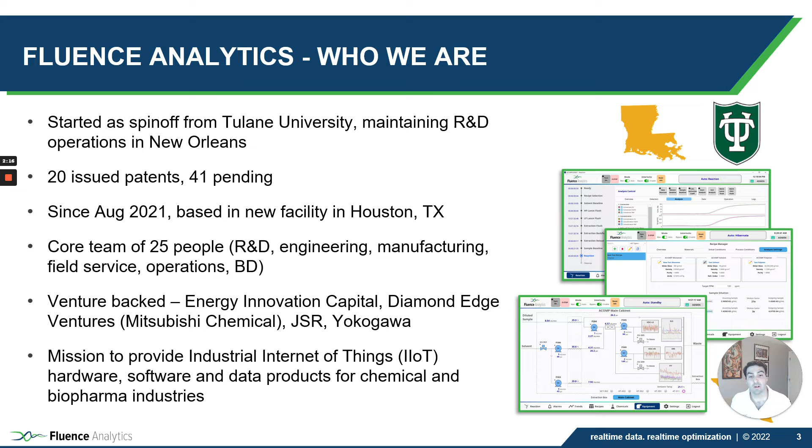We raised capital from Energy Innovation Capital, Diamond Edge Ventures, which is the venture group for Mitsubishi Chemical Holdings, JSR Corporation, and Yokogawa Electric. And our mission really is to deliver products that help our customers produce their products better. So everything from the hardware and software sensors required to optimize production.

So some of the issues we saw in the industry are around this problem of manual sampling. We see visiting plants all over the world that in the polymer industry specifically, there is still an extremely heavy reliance on manual sampling of the process to analyze critical properties of interest.

So what that means is either at the end of a batch or every hour, every 2 hours during a continuous production cycle or semi-batch production, there are operators taking samples, taking them to a QC lab where then a technician does sample prep and measurement, sometimes several measurements. And then you have data that is typically hours old, then sent to the control room either to take a very conservative control action or just see what you made in the batch.

Now, that's not to say this process doesn't work. Obviously, our modern lives are impacted by polymers as they're found everywhere. However, there is some inefficiency when you don't have real-time information about the properties of interest, which is fundamentally what our customers, polymer manufacturers, are selling to the end users, how those polymers will perform in that final application.

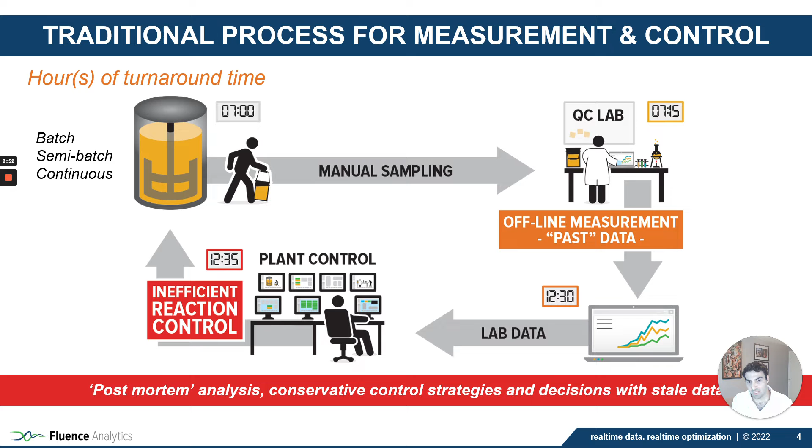So we've seen this. This is a very standard and fairly well-known issue in the industry. So looking at what that directly impacts, if you think about quality, you look at in a continuous production, off spec from grade transitions or deviations from steady state. In batch or semi-batch, you're looking at just not hitting the target you wanted after your full production cycle.

And what that leads to is rework. So maybe you have material that you blend with other products, good product, to get an average product you sell to a customer. Or you are altering your production style and schedule to minimize some of the issues that are known in transitioning materials or campaigning certain batches. So that leads to excess inventory that if you had better control and more dynamic optimization, you might not need.

On the quality side, this we've actually seen within plants: same reactor, same operator, same feedstocks, different product comes out. Then imagine if you take that globally, where you have different feedstocks, translated SOPs, different skill sets of the operators, and the equipment everywhere is completely different. So being able to replicate quality with all of these changing variables is a key point, and can be quite challenging. So that's where more dynamic control or dynamic measurement can be helpful.

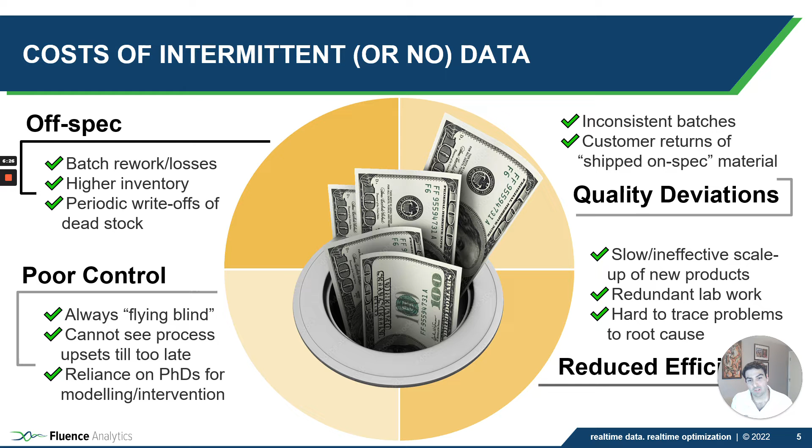And then on the efficiency side, obviously, if you're looking to scale up, crank out new products, change different recipes, target very specific applications, that scale-up process can be slow and difficult. Break-ins in production can be quite time-consuming if some of the issues aren't worked out. And then there's quite a bit of lab work you need to do there, or even tracing problems.

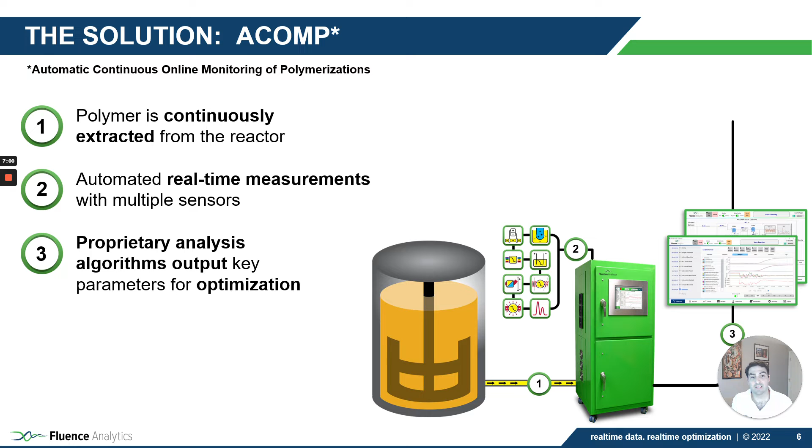So what we've developed is ACOMP, which is Automatic Continuous Online Monitoring of Polymerizations. And at a very high level, this is how it works. We're continuously extracting from the reactor. We have conditioning and measurements all happening in an automated system inside of our enclosure with multiple sensors. And then we have proprietary software that takes that raw data and computes those parameters of interest to our customers, which then goes to the control room where control decisions can be made.

So as you can see in the process, what this means is 30 to 50 times faster data, 36,000 more data points per hour. If you think about it, you get one data point per hour from the lab versus one every second from online. So basically, the amount of information available to the operator, the human in the loop, is orders of magnitude above where we are today.

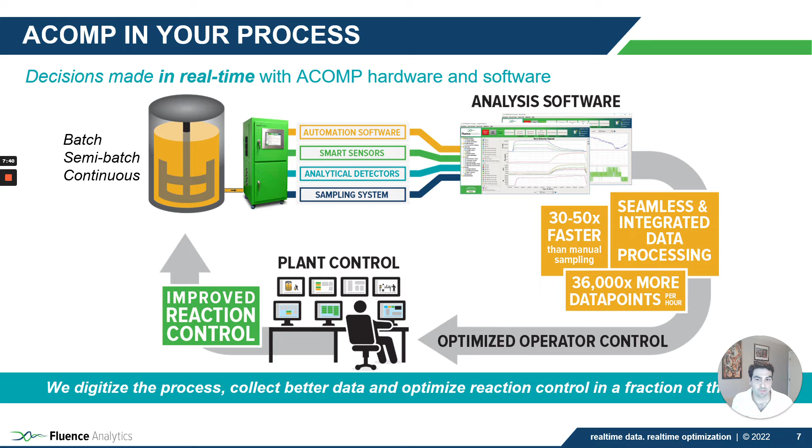And if we think about what that impacts, you saw the costs and the effects of that lack of data. So if we really break it down, how do we translate that to value? We're talking about cycle time reduction and freeing up capacity. We're looking at reducing need for certain analytical testing over time. We're looking at avoiding degradation of product and off-spec production.

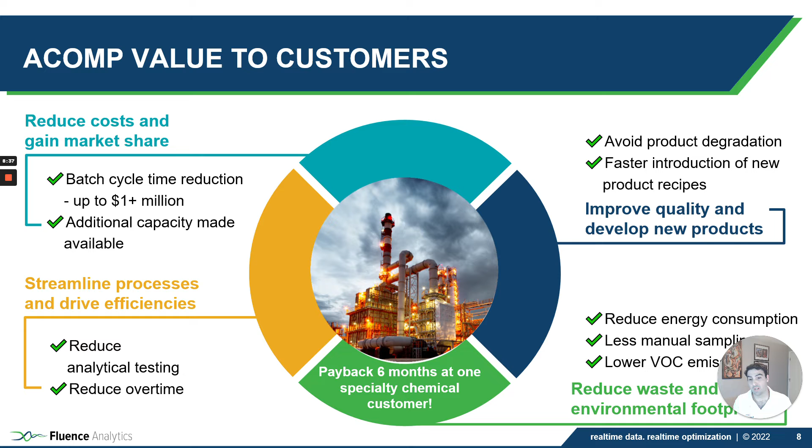And then we're thinking about where we can impact this waste environmental footprint. So the manual sampling, emissions, those are exposures. So those are safety concerns for operators and plant personnel. And then anytime we reduce consumption. And we've seen ROI in less than 1 year, in one case 6 months, for delivering on a few of these different areas.

And if we look at what we can work in, this is not a tool we can use everywhere today. We do have a roadmap to cover as much of the polymer industry as we can. As many of you know, this is an industry that has everything from commodity, high volume plastics, all the way to low volume specialty, high value batches for semiconductors or electronics or certain adhesives and paints and coatings. So it is quite a diverse industry, and so we do have a roadmap to cover as much of it as we can.

But today we're particularly focused on anything that is in a liquid or melt phase, and that's where we can do most of our measurements. And then for other systems, maybe we can't make all of the measurements, but we can track certain other key parameters. So if we engage with you, we can assess your application, some of your objectives for optimization, and see where our technology solution fits.

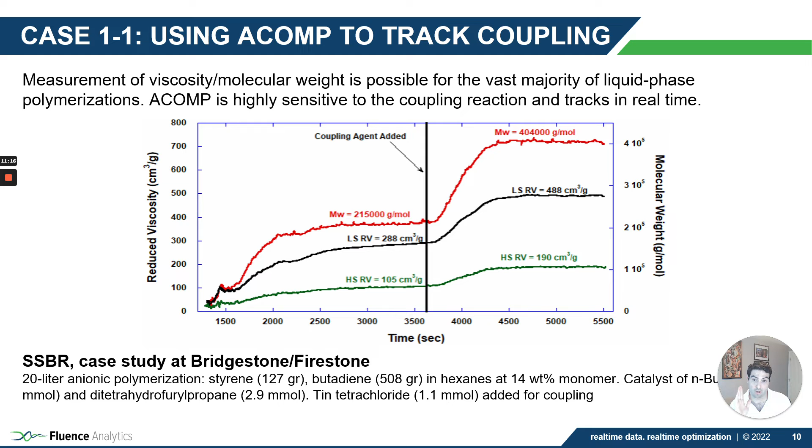And then obviously, if you don't have extra steps, how you can use that data to know when your batch is done if you're targeting a very, very specific molecular weight or viscosity, for example.

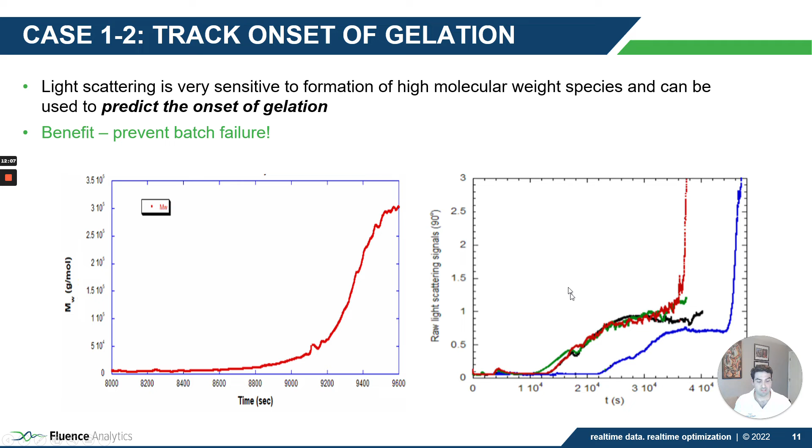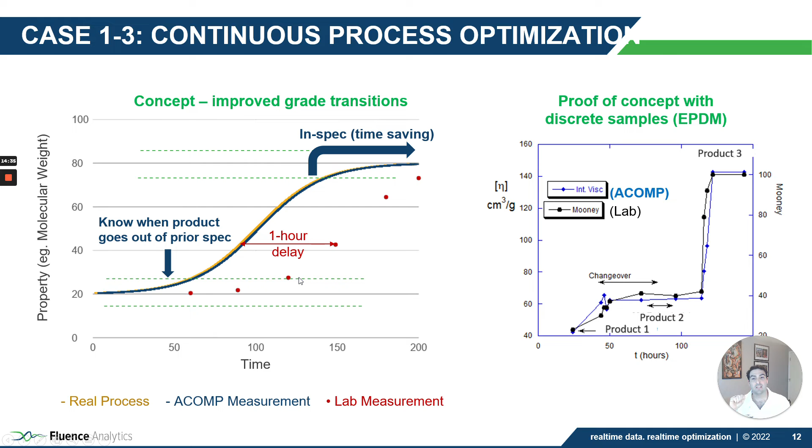A lot of times that control is driven by, or at least validated by, offline data points taken every 30 minutes, every hour, every 2 hours. So you can imagine that the control algorithms used to drive those processes are fairly conservative to account for the fact that there is a lot less lab data. So the advantage here is having real-time information allows a faster path to get to spec and know when you're in spec. And then once you're at steady state, say you're producing at this midpoint, anytime you saw a deviation out of specification, you would know based on the real-time information and take corrective action.

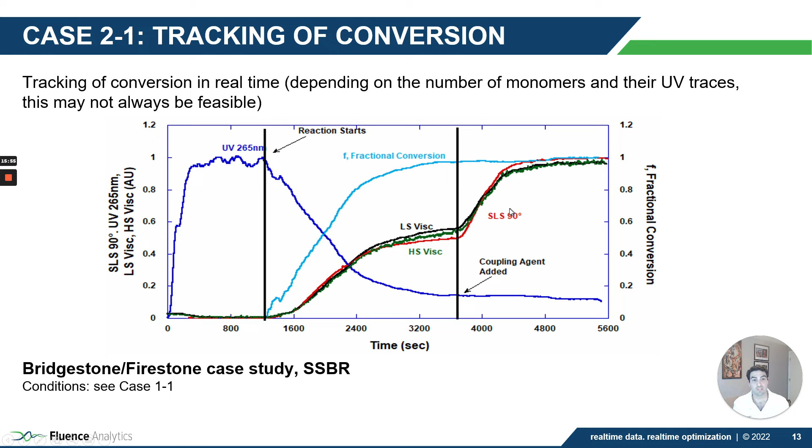In this case, what we were able to observe is that given a lot of the variability, which I highlighted earlier, that you see in batch production, the feedstocks, the operators, the equipment, all those different things that can change, the reality is that you're going to hit your target specifications at different points. The kinetics will vary reaction to reaction. And so what we saw was that on average, if you use the dynamic endpoint, in some cases you were done several hours sooner than the standard SOP.

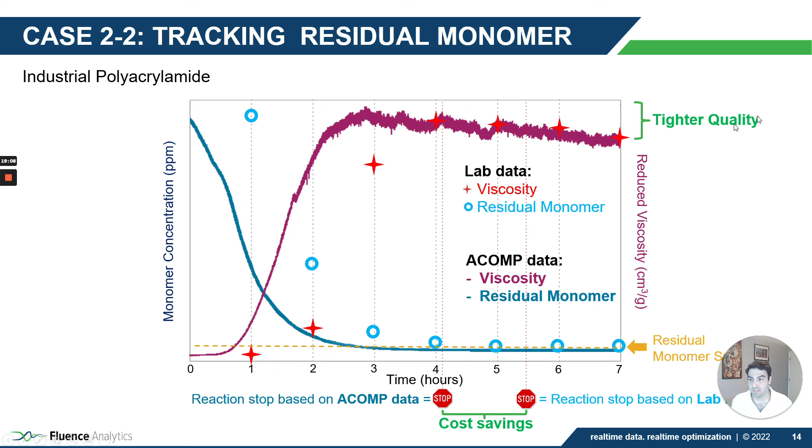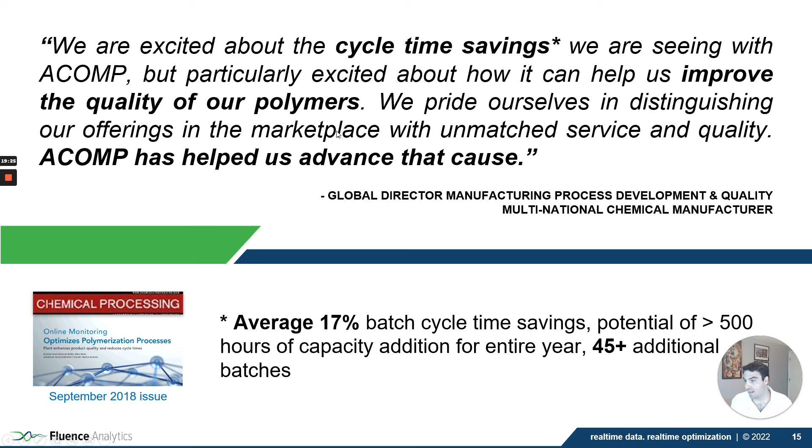A little bit more detail about how the technology works. So as we mentioned before, we're continuously extracting a very small stream from the reactor, anywhere from 0.05 to multiple milliliters per minute. And that actually comes into our ACOMP front end, where we've developed a fully automated set of sample preparation and sample conditioning equipment.

And then we use either a process solvent or a different solvent to get that polymer stream continuously through our process into a very low concentration, which we then flow continuously through our detection, which is typically the intrinsic viscosity and shear viscosity, the UV and the light scattering. In some of the lab cases, we also have the refractive index. And then we get that continuous raw data, which we analyze.

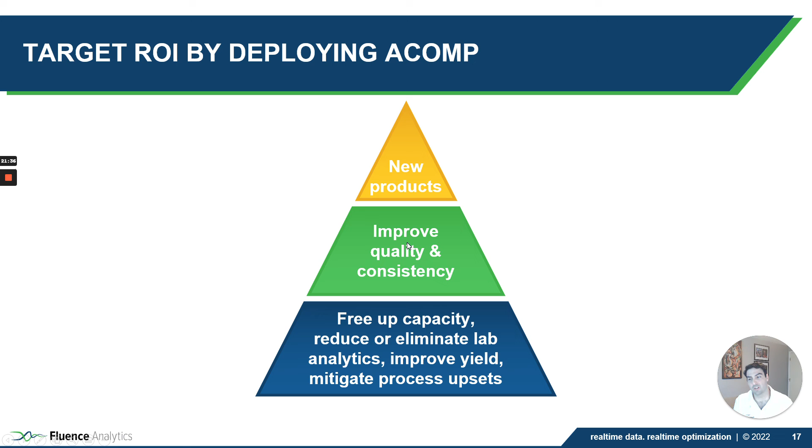So a couple examples would be in the batch and semi-batch process. So this is a fairly large-scale batch production. The key point here is a small impact to that cycle time based on that residual monomer or key molecular weight specification would be significant. So 5-10% impact would be noticeable and would certainly give a less than 1 year ROI.

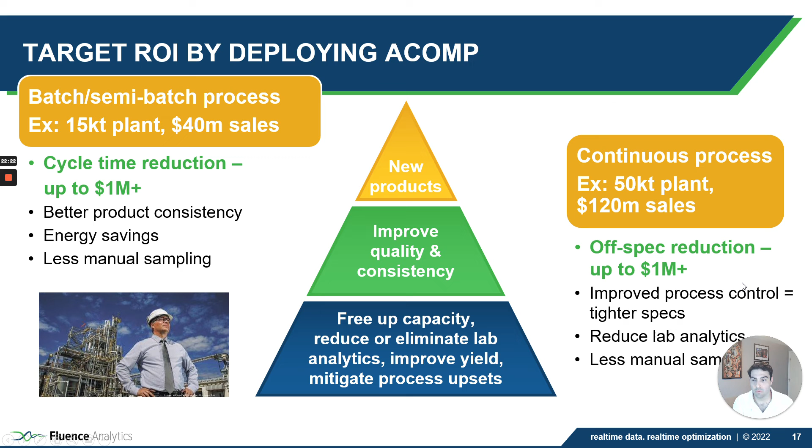And then on the continuous side, the off-spec reduction, this is mainly what I was saying before with the steady state deviation or the enhanced changeover control. So those are a lot of the benefits that we've seen for the different use cases.

Now, as we deploy more of these systems, as we generate all this real-time data, we see a tremendous opportunity for leveraging that information to do feedback control. And so we have developed some technology in this space. And basically what we're looking at is taking that real-time data on the properties of interest that are being manufactured and then sold to end users for performance in applications.

We're looking at that real-time property data and then actually designing control algorithms to partner with the control system that would actually perform feedback control action to drive towards specific properties. So basically dialing in performance characteristic in the end application and making each production run, batch, whatever it is, as close to that specification as possible within a very tight window. So that feedback control based on data we view as a huge opportunity.

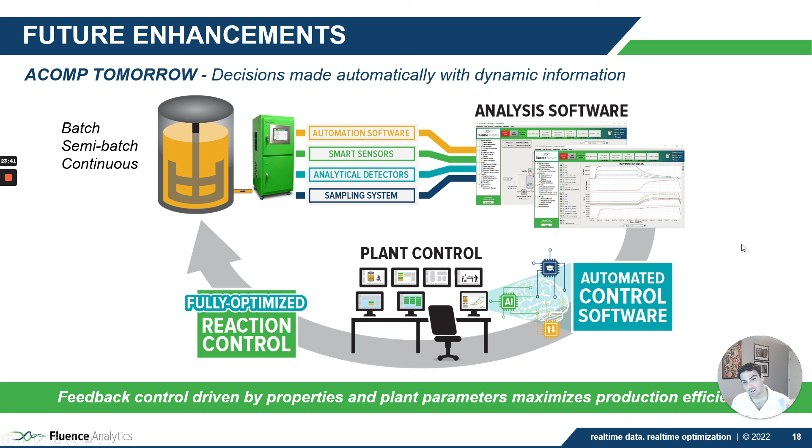As we get more of these systems out there, we partner with our customers to improve this control algorithm and then deploy it further into production. Here's actually a case we did in the pilot scale with that controller.

So here on the left is a traditional polyacrylamide reaction; the batch process is this blue line. This would be your natural trajectory as your polymer molecular weight evolves over time during the polymerization. And then here is the setup we use. So this is your typical ACOMP system with the extraction, recycle, and then all the mixing and

analysis. Here were all the different parameters that we were able to control in that reactor: the impeller speed, heat, cool, adding chain transfer agent, initiator, monomer, oxygen, nitrogen. So we had all these different knobs we could turn. And so the idea was, given we were targeting a molecular weight, how could we change each of these knobs to improve the control of the reaction?

So this would be the process controller, the software that we wrote that did those actions. In this case, we were adjusting monomer and initiator feeds. And here you can see the results. So in order to show a very different trajectory than what would be the natural path, we actually had a set point to increase the weight average molecular weight throughout the reaction.

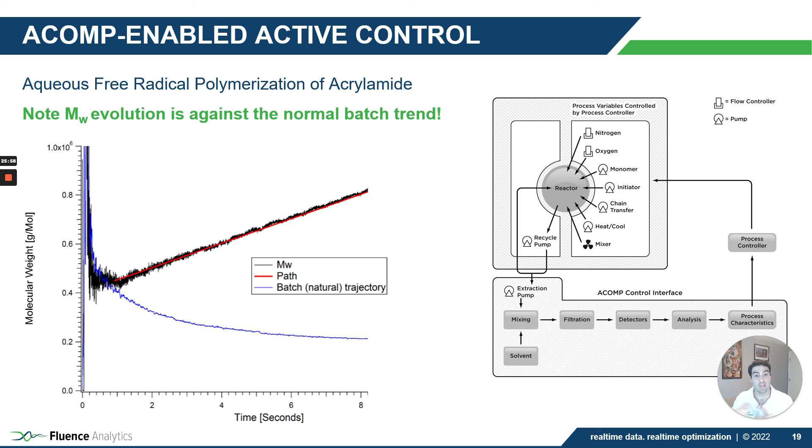things like that. So it was very interesting, and this is what we're talking about when we see the opportunity to control properties of material into the future as we deploy more of the measurement technology that I spoke about earlier with ACOMP.

Another area we see opportunity is data contextualization. If you look at a typical plant, there's a control system with a lot of real-time process information. You have a process historian, which has a lot of information stored. So most plants have terabytes of data that they could access over many years. And so combining these things with the context of the real-time properties is huge, because then we can look at which process conditions, in real time and in historical data, affected and created certain results for properties.

And then you have the feedback that you can correlate to other lab data, so you can build advanced correlations over time to a number of parameters. If you have real-time properties, regular real-time sensor data, temperature, pressure, feed rates, combined with that lab data, all of a sudden you're looking at a very interesting mix to optimize over time.

And then troubleshooting. So if you have any kind of quality issue, as indicated by the measurement technology, tracing that back to whatever it was in your feedstocks or anything in the ERP, for example, that you could then identify as the reason for that and get to the issue faster.

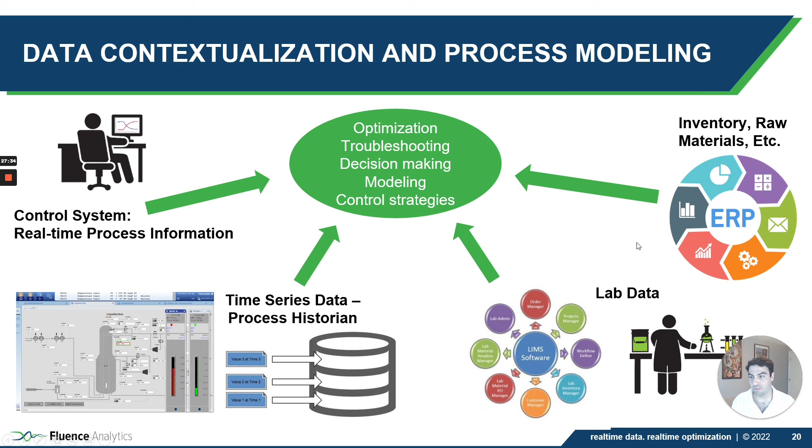And then just to sum this up on the applications, a lot of the materials that we're working with are elastomers, water-soluble polymers, some engineering plastics, adhesives, paint and coating applications. So there's a lot of different polymer materials that go into these. Those are particularly of interest today, and we are under different development projects working with certain customers to expand into applications that we're not working in today, as I noted before.

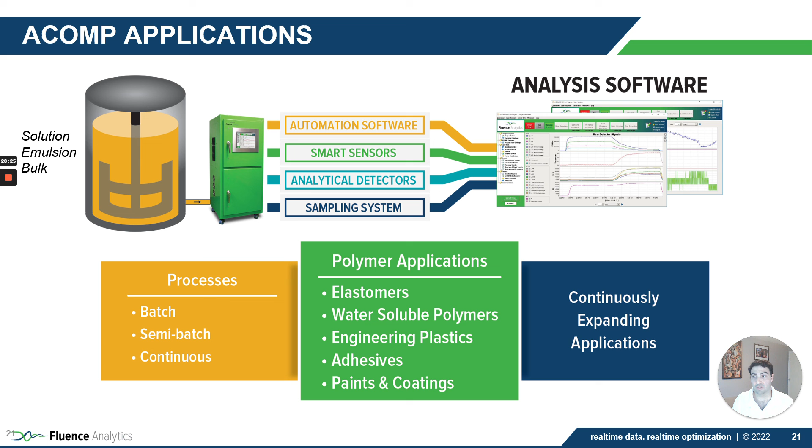And then batch, semi-batch, continuous. So we worked in all types of conditions and processes: solution, emulsion, bulk. So whatever the conditions are, those are of interest to us to at least see if we can work with companies to help them optimize.

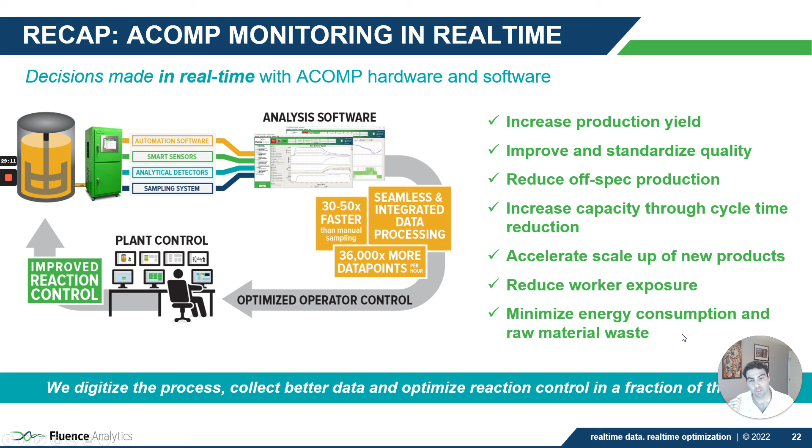And so pulling it all together, today what we're offering is a real-time data set that's never been generated, and we believe, based on our customer feedback and data we've had in the field, that it adds tremendous value in the optimization of production. Some of the key benefits, as I noted before, are the production yield, the quality aspects, reducing off-spec, increasing capacity, launching new products faster, reducing worker exposure, so safety, and then all of our targets, which are to minimize energy consumption and raw material waste.